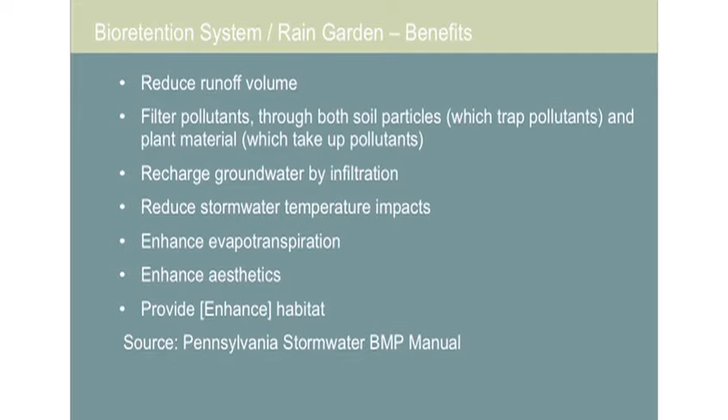And why? Reduce runoff volume, filter pollutants, recharge groundwater, reduce stormwater temperature impacts on streams, enhance evapotranspiration out of the plants, enhance aesthetics, and enhance habitat. Bioretention areas, rain gardens, are a water quality and quantity control practice using chemical, biological, and physical properties of plants, microbes, and soils for removal of pollutants from stormwater runoff. I really like that definition. So that's what a rain garden does.

So here in our region, we have highly built up areas, and the runoff from those areas contains pollutants. And most storms are small storms, so by catching the first inch of runoff from pavements, you get most of the pollutants. So rain gardens are basically a water quality control system, and they do reduce volume a little bit.

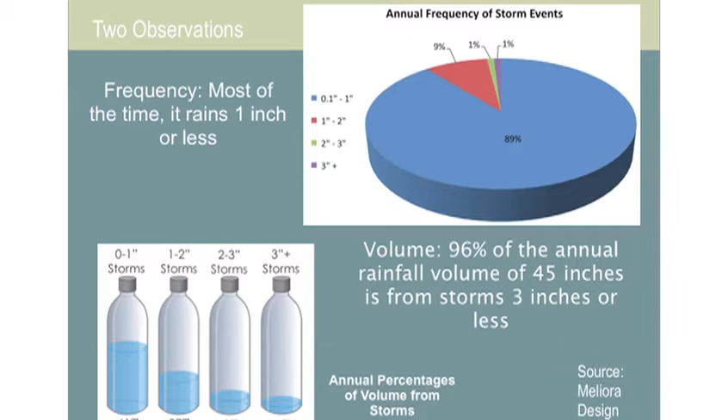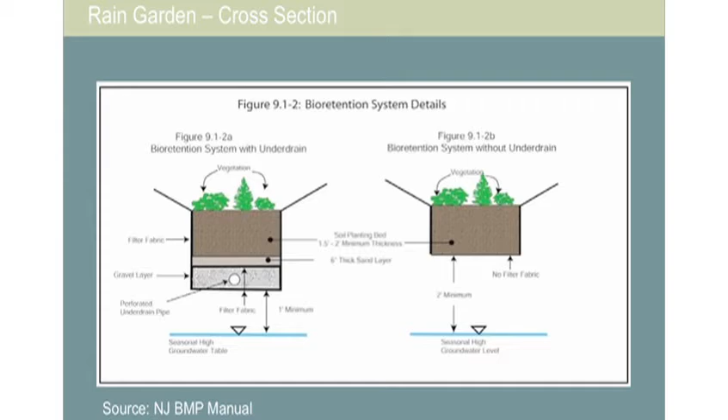There's two basic types of rain gardens, one with an underdrain and one without. If the soils don't perk well, you use an underdrain, or if you really want to engineer it, some projects, like for a new construction, require a quick drain down of the soil within 2 days. So an engineer might choose to put an underdrain under it, but it adds a lot of cost, and I usually like to avoid that.

The infiltration testing process, first step is background evaluation. Things like soil surveys and looking at existing conditions. There might be a sketch plan from an engineer or that you do of where you think your rain garden might go. Now, if it's in your own backyard, it's pretty obvious. You know, you have a low area, maybe you want to put the rain garden there or away from the house. So just some basic background investigation.

And then for more serious engineering of rain gardens and bioretention areas, it's important to do a test pit, digging down about 72 to 90 inches. And I'll have a picture of what that looks like. So that's clearly with a backhoe. If you're doing a backyard rain garden, you really don't need to do this. It's a little bit more of observation, where if there are puddling areas in your backyard and they drain down within a couple of days, you've got a pretty good perk. So you don't have to go all the way down and do the major engineering.

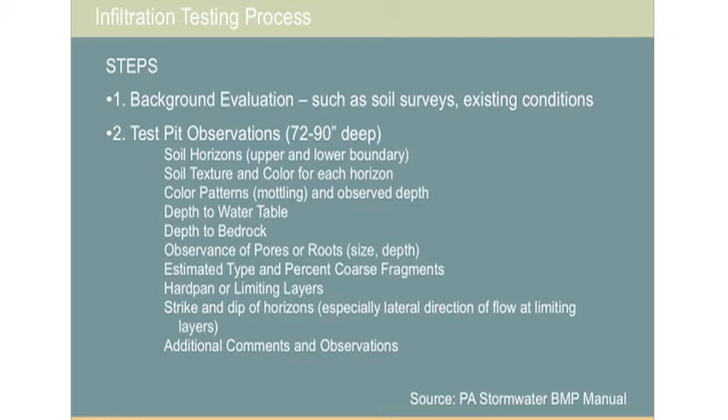These are the test pit observations when doing that. You look at soil horizons, soil texture, color patterns, depth to water table, like is there water down there? There's also an indication, which I'll show in a minute, of water table, how it affects soils. If you hit bedrock, clearly that's not a good place for a rain garden if it's shallow bedrock. And then just look at the rest of the features down in the pit.

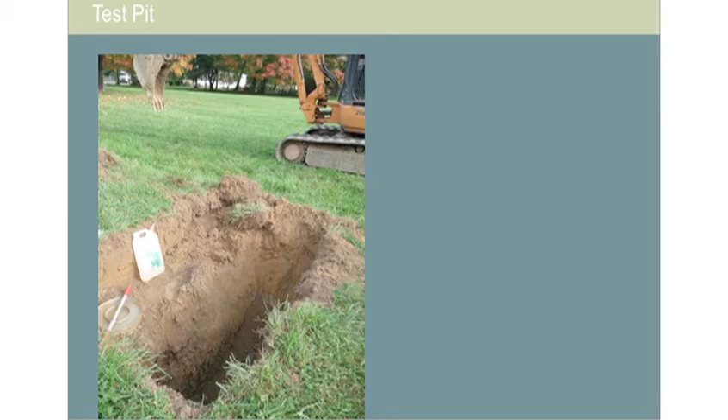That's an example of a test pit. This is Meliora that we worked with on Saddler's Woods, which is a Van Sciver rain garden. So it's about 6 to 7 feet deep, and it's used to check out the soil. And then there's this shelf right here, which is done where you can do the infiltration testing. So this is a pretty, yes?

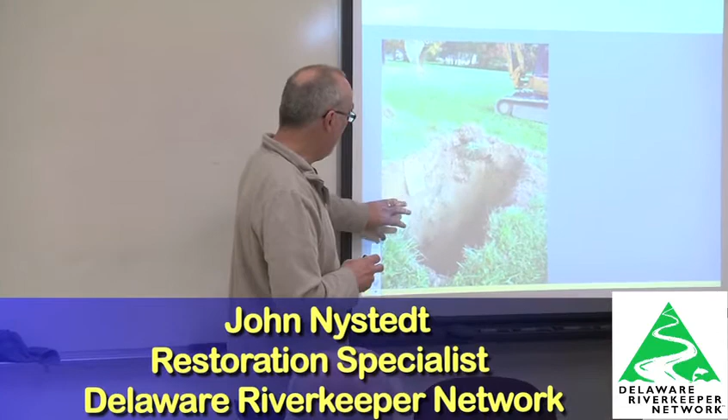So this is what we'll focus on a little bit today, the actual infiltration testing, but it's a whole process.

One thing one needs to do when looking down in these pits is to find out if there's any soil mottling showing some intermittent high water table. So when the water saturates the soil, it tends to be gray and does that type of mottling. So if we found that right here, which we did, we know that there is a little bit of water table coming up seasonally in this area. So it gives an indication.

If you have a high water table, it's hard to get percolation. Now in an engineered facility, getting approvals, that's a big deal. But if it's your backyard and you have an intermittent high water table, it's not the most horrible thing to have a little extra water some years in your own rain garden. My rain garden's like that. Some years it might fill up for a couple of days, but usually it just drains right down.

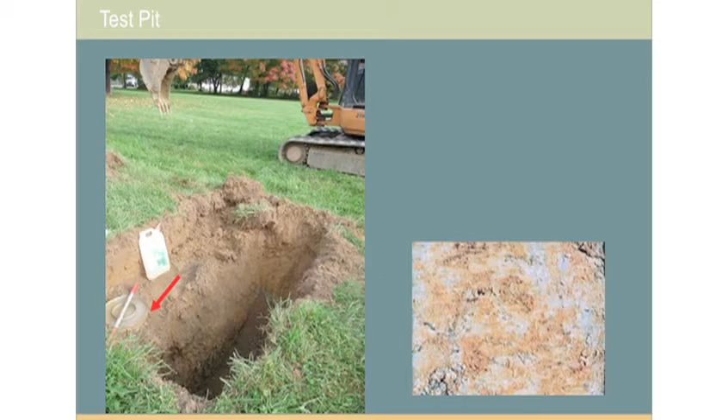This is the infiltration. That's called a double ring infiltrometer, and that's a pretty standard Pennsylvania test. And we'll talk about that a little bit more. It's important to do soil testing. I can't emphasize it enough. There's a whole transition now in the design field. Make sure to do the soil testing at the beginning because it helps everything at the end. You can save thousands of dollars.

If you do the soil test at the beginning, then you can figure out how to do the soil mix at the end. So a typical process is you get through it, you forget to do the soil test. You get to the end, you talk to the landscape architect, and they say, I really don't want to buy all these hundreds of thousands of cubic yards of rain garden mix. Can you use the soil that's there? And they'll say, well, I don't know what's there. So do this testing at the beginning.

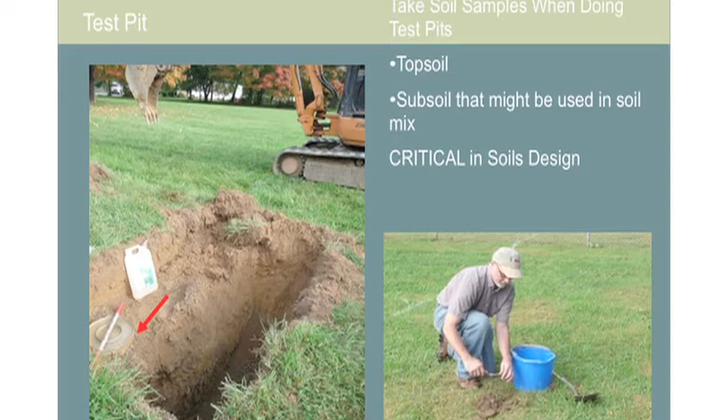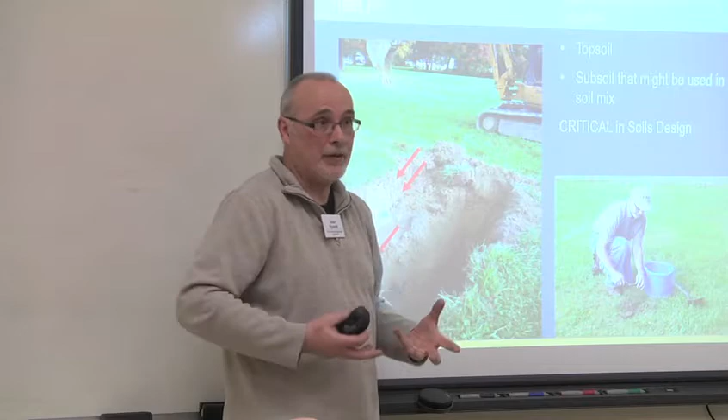Typically, what I test is the topsoil and then a little bit of the subsoil. So if we're going to dig down about 2 feet in this rain garden, then you know that soil there is available to mix into some new soil for the rain garden.

Infiltration testing you want to do at the intended bottom of the garden soil. So say you have a rain garden that is 1 foot deep, where the ground goes down, so you're going to dig down about 1 foot, and then there might be 1 foot of rain garden soil. So you want to go down 2 feet from the existing grade to do your infiltration test. The trick is to do it at the bottom of your new soil. So you've got to dig down.

Now, a lot of the videos you'll see of how to do an infiltration test informally, they just dig a hole right at the surface and do an infiltration test right there. And that often doesn't give a real indication of what's going on 2 feet down where the real percolation is happening.

So there's actually an exact nomenclature. Infiltration is the rate going straight down. Percolation, for the purposes of this presentation and Pennsylvania regulations, accounts for going straight down and sideways. So an infiltration test is actually what we want, what goes straight down, because a rain garden has a big area, water's going down everywhere, and very little's getting out the sides.

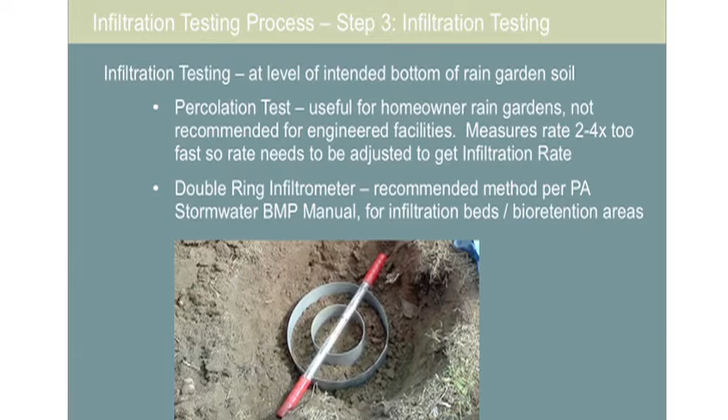This is a double ring infiltrometer, and how it works is that you fill up both sides. And we have one of these. We'll play with them a little bit if we have enough time. We'll go outside and do a quick demonstration. Fill it up, saturate the soil, and then the outer ring stays filled up. And what's measured is the inner ring.

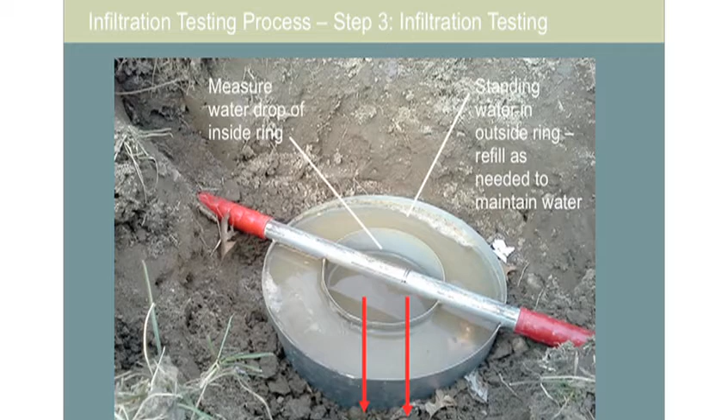So you keep adding water to the outer ring to keep it saturated, and the inner ring is where you measure. So if it goes down an inch in an hour, that's a good infiltration rate. Even a ½ inch in an hour is usable.

So what happens is the water in the outer part of the ring saturates the soil. Similar to, think of a whole rain garden situation. There's water coming down everywhere, so what you measure is the very middle. So the homeowner could dig his hole and saturate this hole first and then measure it. Is that a reasonable approximation?

No, that's a percolation test, and then you have to give the factor. So you have to reduce that percolation. I'll get to there in a second. You reduce that percolation rate by about 1/4 to about 1/2 to get to the infiltration rate.

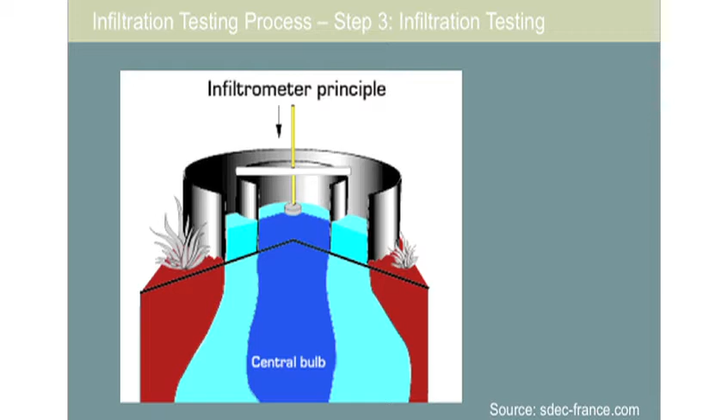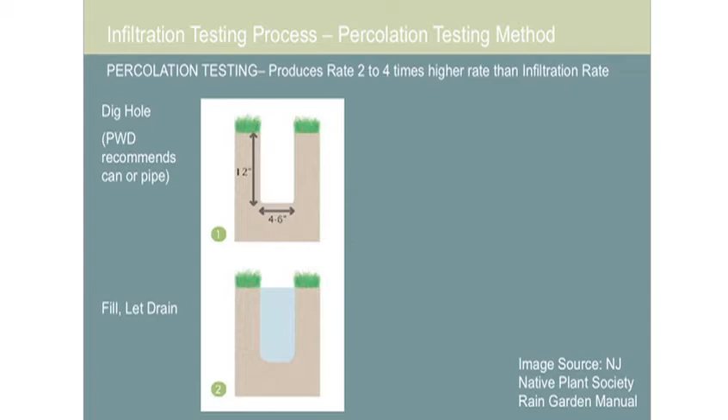So this is more of a test you'll find online, Philadelphia Water Department. You dig a hole, and you just fill it up, saturate it, and then start again. So we can do this at our homes pretty easily. Dig a hole down. Philadelphia Water Department says to put a can in or a pipe in here. So New Jersey Native Plant Society, say if you fill this up, and I'll get to it in a second, this is the saturation point. So you let all that draw down.

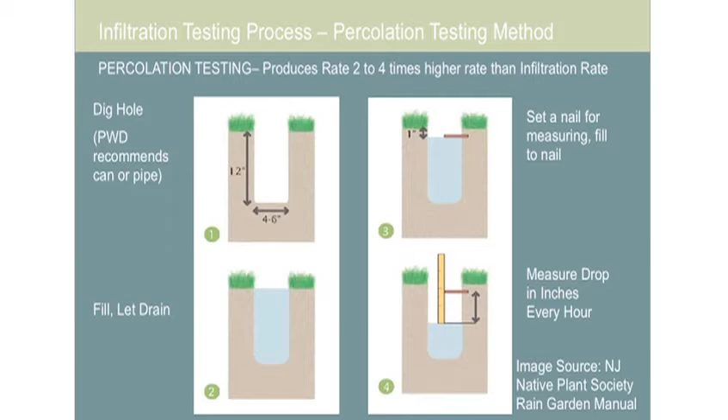And then here, you fill it back up to about 1 inch from the surface, put a nail in, and then measure the rate of drop. Now you can see this water is going out the sides too, as well as out the bottom, which is fine for a dry well, but for a rain garden, that's not really applicable. So there are technical factors that the Pennsylvania Stormwater Manual gives to it. Very technically, you can look it up about the reduction factor, but it's anywhere from 2 to 4 times reduction factor.

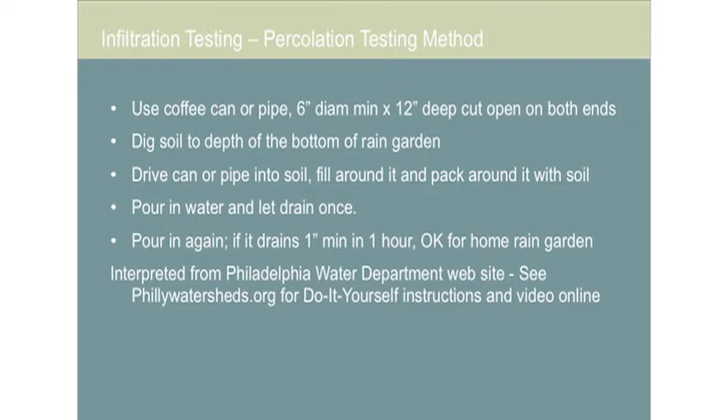What that probably relates to, and they call it infiltration rate, it's really a percolation rate. It probably relates to about a 1/2 inch per hour infiltration rate. Now the New Jersey Rain Garden Manual, they don't say to use a pipe on the edges. So they can perk out the sides, and they use a different number. It says 1.5 inches per hour is a minimum rate. So it looks like they've already adjusted it for it going out the sides and out the bottom. And again, that probably translates to about 1/2 inch per hour infiltration rate.

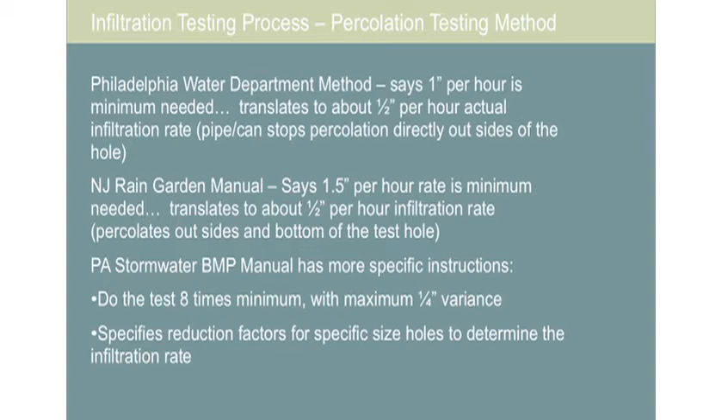The Pennsylvania BMP manual has more specific instructions. It does allow this type of testing for rain gardens, but then you have to put all types of factors on it. You have to do it 8 times minimum, and each time you measure it, you have to have a 1/4 inch difference. And if you don't get a 1/4 inch difference, you have to do it again and again and again. It's very hard to get a quarter inch variance. And then it specifies reduction factors for the specific size of the hole and how deep the hole is. So that chart's online.

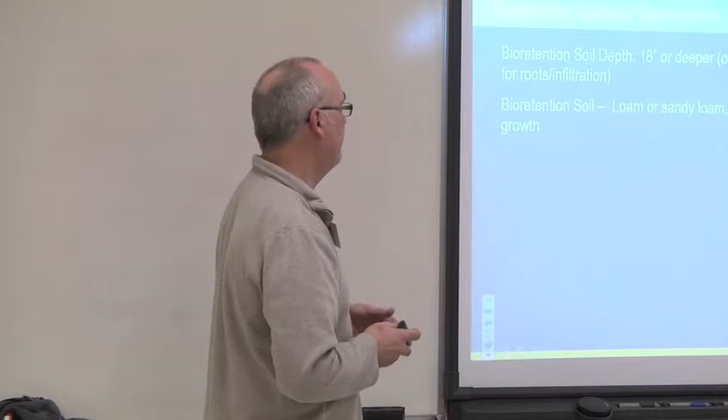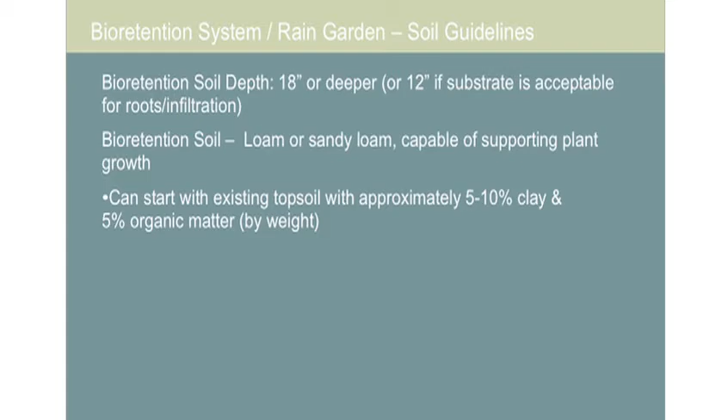So let's get into soil. Bioretention soil depth. 18 inches is a good depth. 12 inches works. 36 inches works. Everything helps. The soil can be loam or sandy loam, capable of supporting plant growth. And this is out of the Pennsylvania manual. You can start with existing topsoil. So if your existing topsoil already has 5 to 10% clay, that's a good topsoil to use for a rain garden soil mix. And you can blend it in, and it may have 5% organic matter by weight. That's just like the normal organic matter of our existing soils.

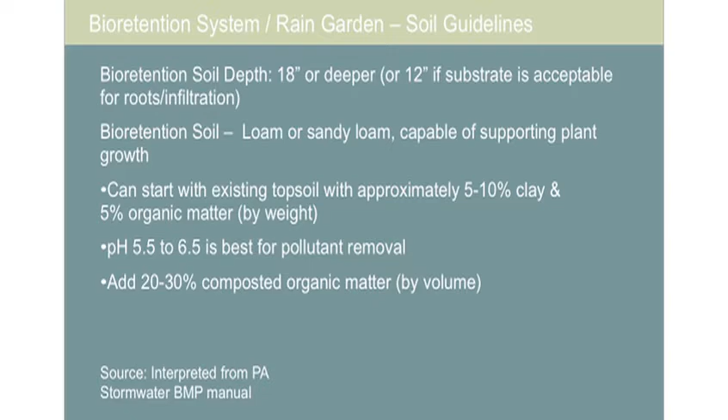pH 5.5 to 6.5 is best for pollutant removal. And then the manual says to add 20 to 30% composted organic matter by volume. So that's a good basic spec. Most people, if you have a reasonable soil, can just add compost, and it will work. But I just thought it'd be fun to look at the chart here.

Okay, so it's a loam or sandy loam in this part of the soil chart. This is the clay, so follow the lines that way. This is silt, follow the lines that way. This is sand, follow the lines that way. So I just really like this. It says loam, 20% clay, 40% sand, 40% silt.

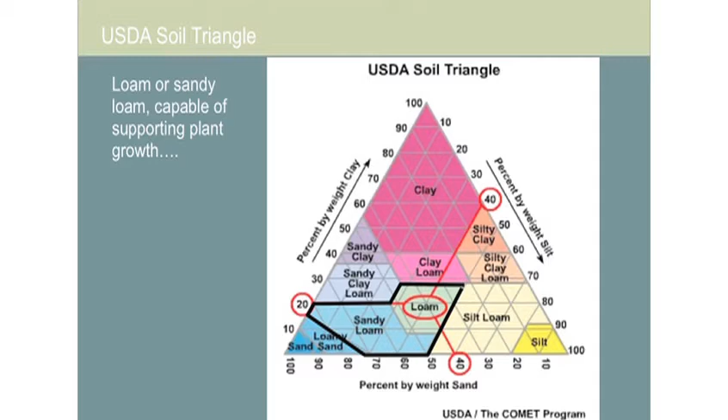This is the area that is useful for rain garden mix. But it's really nice to have the sand component in the 40 to 70% range. So a little bit more in here is a rain garden soil.

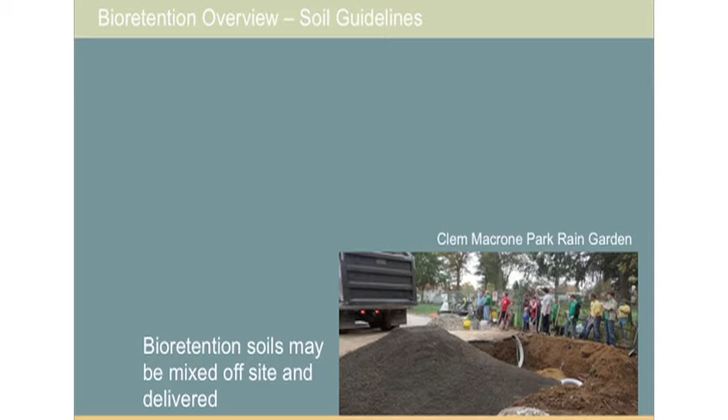I'll do another recipe here if you're going to just make it, or sometimes you buy it from a place that makes it. 50 to 60% sand, 20 to 30% topsoil with a low clay content, and 20 to 30% leaf compost. And that's from Prince George's County. They're leaders in bioretention techniques. They're a good resource. And they say for a residential rain garden, sandy loam, loamy sand, and loam soils are usually okay. The soil test will tell you what you have.

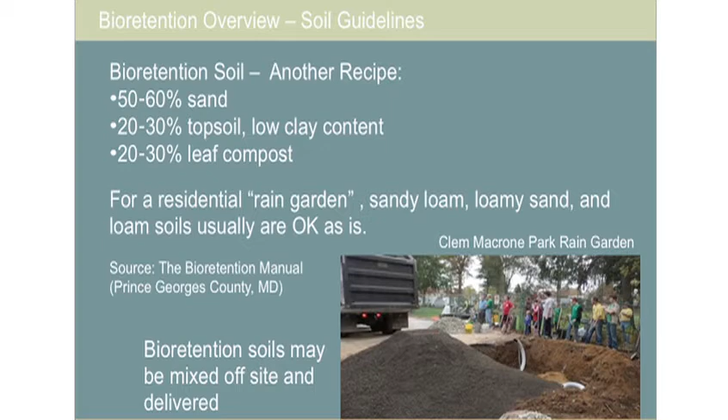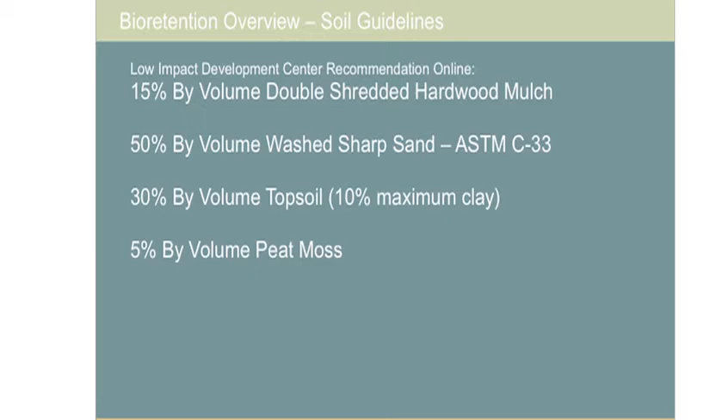This is another one I found online, a little bit different. This is the Low Impact Development Center. So they say 15% by volume double shredded hardwood mulch. So that was an unusual one compared to a lot of other standards. 50% washed sharp sand, that's about right. Topsoil, yeah, that's okay. 10% maximum clay, and 5% by volume peat moss. So I put this up as you can't always follow everything you find online.

I generally wouldn't use hardwood mulch, double shredded. It tends to be shipped down from Canada. Try to find a local composted wood chip. What the wood chips or the hardwood mulch do is they break down slower. So it's similar to a green roof soil mix that has a little bit larger material. It breaks down slower, so it gives a long-term organic matter input. So I haven't done this, but I see the logic in it.

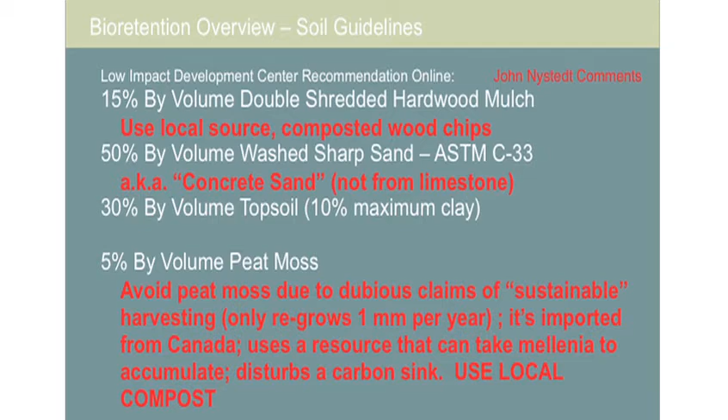50% volume washed sharp sand. That's good. It's also called concrete sand. Just make sure it's not from limestone, which changes the pH. Now, peat moss is pretty unsustainable. It takes millennia to grow. So I would never use peat moss on a project. It changes the pH too. Not bad, it lowers it a little. But try to use local compost.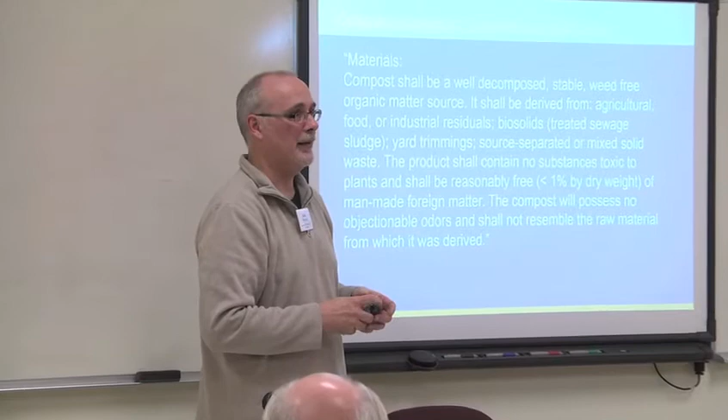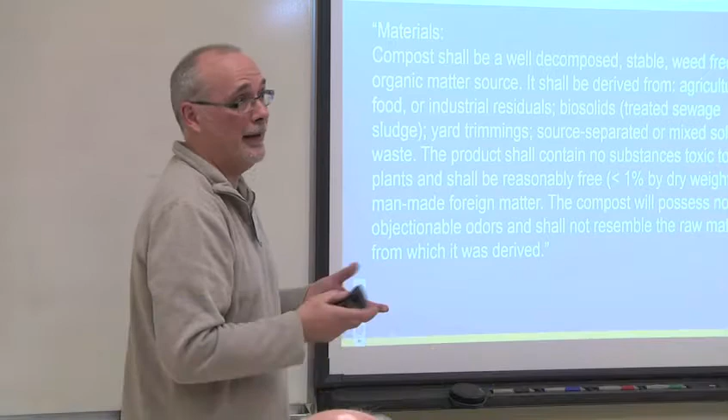Yeah, what I like, and it's in another slide, is I like to get it directly from the tree crew of the town. If they take down a tree in the summer, it comes with leaves and it comes with wood chips. And then you stockpile it someplace and then use that in the soil mix. So I like to know where it came from, because usually the tree crews aren't taking down invasive plants. And almost none of the street trees that I know of resprout from little chips. So it's more like the ailanthus that would resprout, and they tend to not be street trees, except, well, Philadelphia would have some.

Compost is an important item, and it's a little bit of a mystery, so I just thought I'd show you. This is a technical spec for compost. It does include in here sewage sludge, so you can just delete this definition. This is used in a soil mix when one might be buying one. So as a landscape architect, this is a type of description we would use for compost. I won't bore you by reading it. It needs to be weed-free. I've seen some soil mixes come in that are full of weeds. So it's good to know the resource and ask for the references.

Good landscapers will know who has the weed-free compost, because if they buy it from somebody who has a lot of weeds and they all come up, it's a pain in the butt. So they like to buy from weed-free suppliers. And how they do that, it might be what they blend, or if they compost it very well, it raises the heat and kills weed seeds. So the best thing to do is say reasonably weed-free. It's really hard to get it perfectly weed-free if it's an organic type operation.

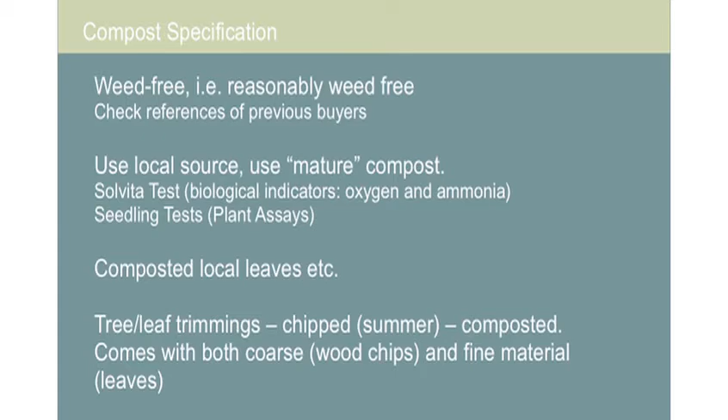Use a local source. Use mature compost, so that as it's breaking down, it's giving off gases, oxygen and ammonia. And then the other way that it's tested is through seedling tests. So these are two ways to specify compost as mature. Composted local leaves are perfect, like we're talking about in tree leaf trimmings.

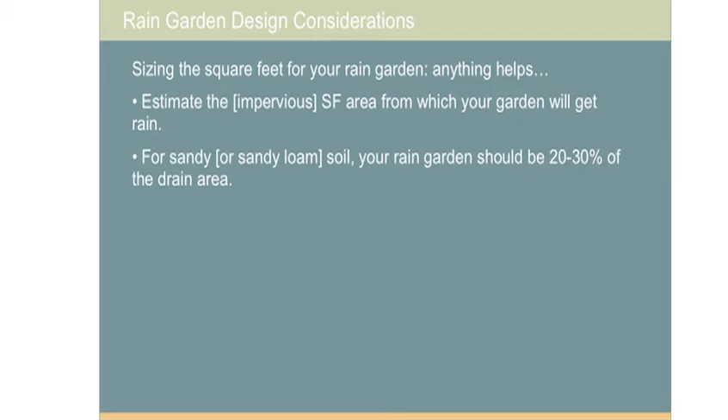Just quickly, I'll just talk about sizing the square feet of the rain garden because it is affected by the soils. If you have clay soils, more clay soils, the rain garden has to be bigger. So what you do is you figure out, okay, you've got this much roof, how big should the rain garden be? So if the roof was 1,000 square feet, the rain garden should be 200 to 300 square feet. So 20 to 30% of the drainage area.

If it's clay soils in your rain garden in the backyard, it ought to be about 50%, about half of the size of the roof, because it takes a lot longer. These are just ballpark figures. They help in planning. If you improve the soil drainage and the soil, or put in an under drain, then the rain garden generally should be about 20 to 30% of what's input.

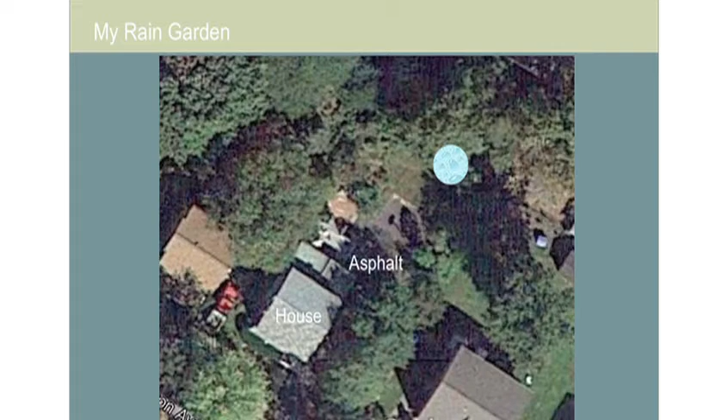So that's my little rain garden in the backyard. And I took this tree home in a paper cup from one seminar once. It's a river birch. Just quickly, my home, asphalt, rain garden over there. I did put some of the downspout into a pipe. I use it to water the garden through perforations, and then it overflows into the rain garden. It also takes water from the asphalt and from the landscape. That perforated pipe also happens to provide aeration for the garden too. So it's just a nice system.

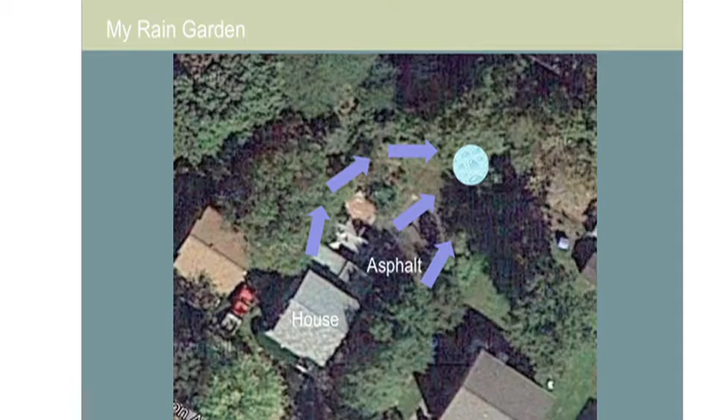This is one of the Delaware Riverkeeper Network. It was engineered by Melior Design and designed by Delaware Riverkeeper Network and Jonathan Alderson Landscape Architects. And I did show this last year, but I'm just going to get into the soils parts. We did soil testing. The rain garden wraps around the school. So we did soil testing and infiltration testing in 2 locations. And it was very interesting. The 2 locations ended up being very different. One had a lot of clay and one had a lot of sand.

So the topsoil was sandy loam generally everywhere. The critical thing to remember is clay. You want to be about 10% maximum. If you take one thing out of this seminar, 10% maximum clay for the soils, and you're golden. The pit east of the school had 23% on the clay, and the pit north of the school had clay down at 8%. And then we did do infiltration testing, so you can see the 23% had a ½ inch per hour infiltration rate, and the one that had clay of 8% had 1.44 inches per hour.

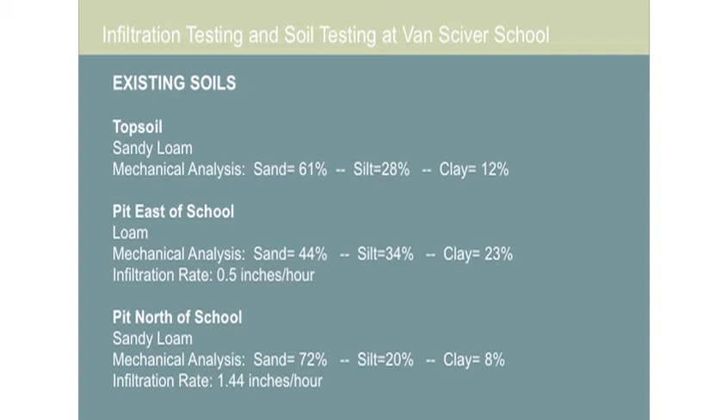So we adjusted the design on this. Just quickly, we took some of the sandy soil from the back, and put it in the front in a trench, and we took some of the clay soil that we had to excavate anyway out of the front and used it to make the berm in the back. So on this project, here is some of the rain gardens, then it wraps around the school right here. So this is the area that had a little more clay, and this is when it was just scooped out, not planted yet. Is this project written up somewhere so that one can see it?

Well, that's a good question. I should do that, right, Tracy? Yeah, absolutely. I'll do it as a fact sheet online. We'll get that up. We did present this also at the Villanova Stormwater Conference to the engineers there. So it's been published in videotape, but you're right, it should be online so you can just click on it and learn. Well, it's on videotape though at Villanova. It's on videotape from last year here, actually. Okay. Yeah, so it's on that one. I went into it pretty detailed.

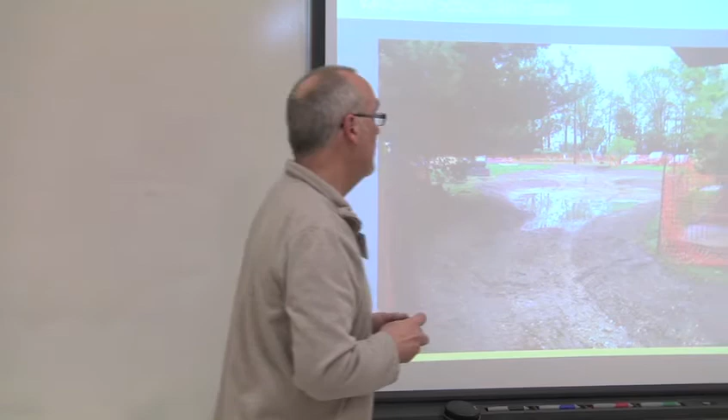Are those the clay soils making up your berms on the side, and were they placed by... Oh, that? Yeah. So this one here, for the sake of time, I actually deleted the existing conditions.

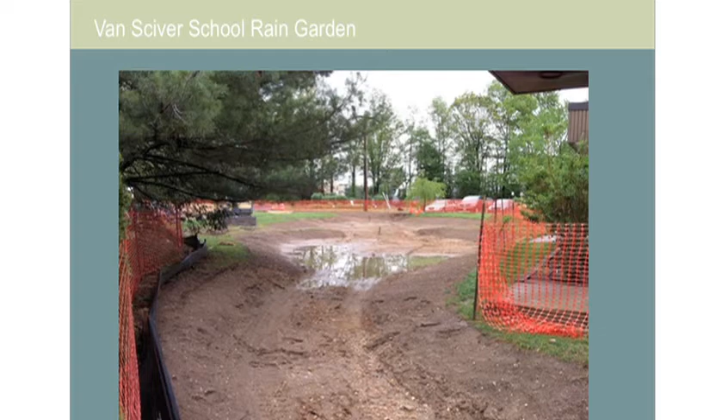This was flat lawn, so this was dug out. That's your shallow, right? Yeah, so we dug that out, and we kept these shallow in this area, just because of the clay soils we were worried about ponding. And we took that clay soil, and then for the rain garden down further, we built up the berms at the end. So that wrapped around the building. So now I'm going to go back here.

In general, I think it's just very important to include compost. Even if the soil didn't need it, it's important to do compost if just to get the top of the rain garden soil dug up a little. So you just heard another presentation about the compaction from the landscaper while they were building the rain garden.

Well, if you say to mix in compost at a certain ratio into the top 6 inches, then the last thing that contractor will do, if you keep an eye on them, is mix in the compost, and then they're done. So they mix in the compost, backing out, and then you have a nice friable soil top that allows infiltration into that soil. Mixing it in by a big rototiller?

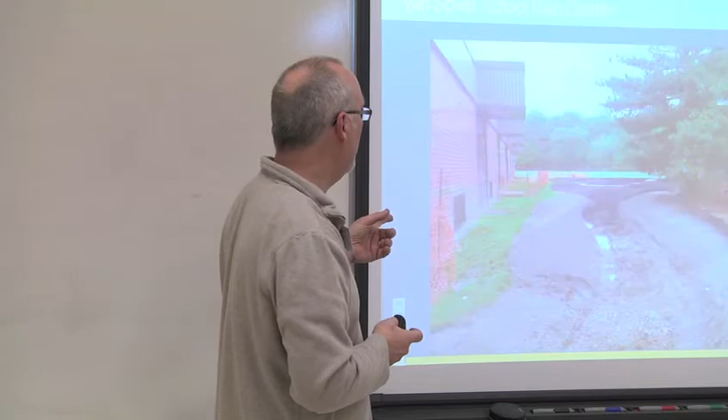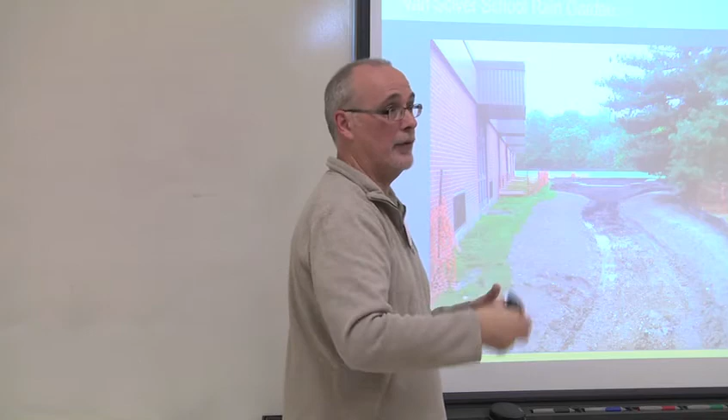Well, yes, people use rototillers. On this, they use something called a soil conditioner. I should have a picture of that. But they had a machine that had a cylinder about this big and it had things sticking out of it, and it would actually till the soil. And they use that for a couple of things. They use that to rip up the existing grass too. So that's what they chose to have on here. It was a light machine.

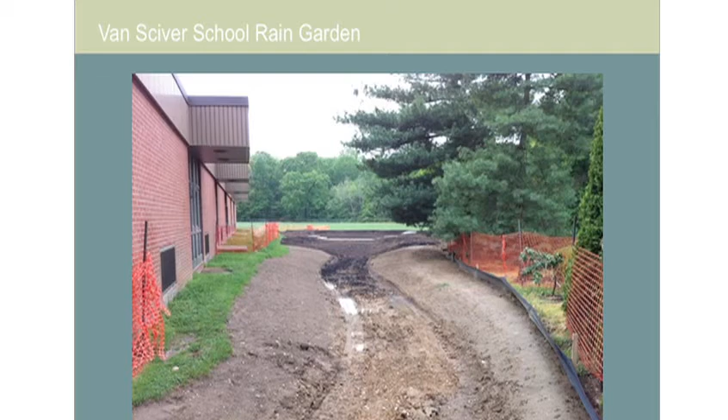So here it is, mixing it in. You can see this is the unblended soil here, and that has the compost blended in. So we're backing out. Oops. Yeah, backing out. And this is just a picture of that same area finished about a year later. There's a lot more I could go into this. I'm thinking that we should get outside and do a little infiltration test, but before we do that, any questions?

Does that affect the soil? Is it the salt content? Or? Yeah, that's what it is. And so it's a local recycled material. That's a plus, but it does have some factors in it that are worth caution.

What time element is connected with mature compost? 6 months to a year, but like for me, when I pile my leaves in the backyard and I don't have enough grass clippings, that doesn't do anything for 6 months. So if it's done right, with the right ingredients, and there's all kinds of online. Who does composting and just can answer that question? 6 months, a year? You got to aerate it. Yeah, it has to be aerated.

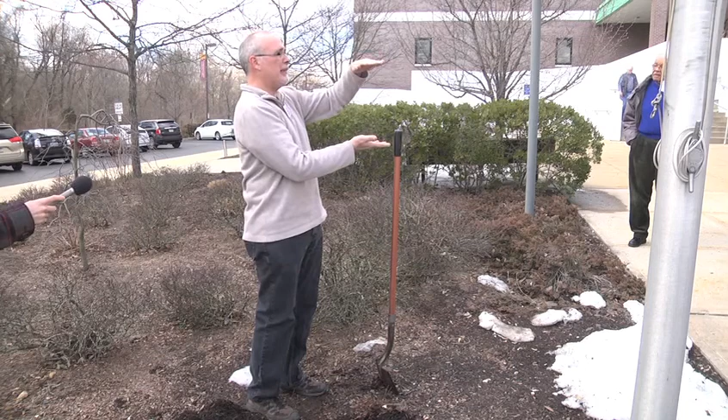The rain garden's, say, a foot deep. It might fill up with 6 inches of water, and then you might have a foot of rain garden soil, maybe 2 feet. So the trick is the percolation is below that, because your rain garden soil should be designed to have low clay and enough sand in it that it'll go through. So what you care about is what's under that. So let's assume this is down a couple of feet.

This needs to go in about an inch, 2 inches, they say. Sometimes these are 6 inches high, but this one's only 4 inches high. So if you had a 6-inch high one, you could go in 2 inches and have about 4 inches left over for water.

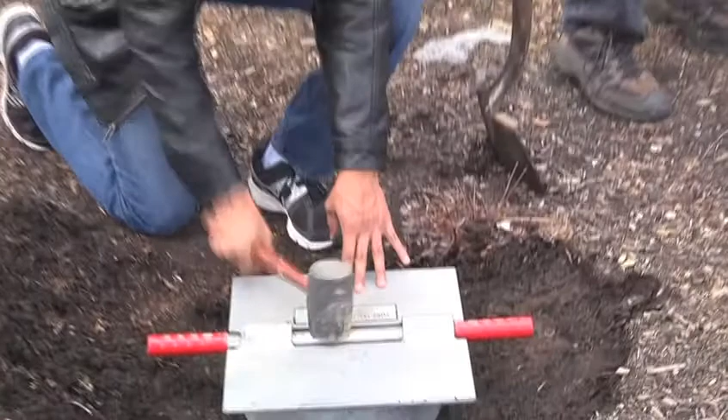It's fun to do. You have to bang it in. That's what this is for. There's your sledgehammer. Stand on this side because we have a camera there. And just bang that down. Hold your ears. Yep. Let me get all the way around. Good. That's good. Probably a little bit more. Trick is to be level. A few clicks. Pretty much, let's assume it's level.

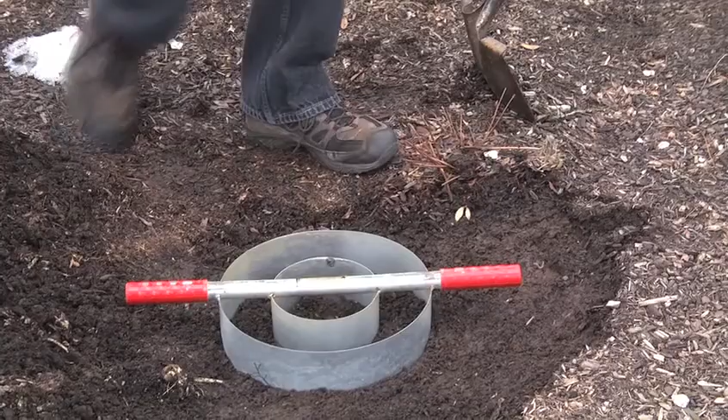The first thing you do for about an hour is fill it up and soak it. Center and edge? Yes. So we'll assume we've pre-soaked it. You see here it says testing procedure, pre-soak. During the pre-soak period, there's a protocol for how fast it drains, and then it determines the intervals of how often you test. The interval is usually every half hour, but it might be as little as 10 minutes if it soaks through fast on the pre-test.

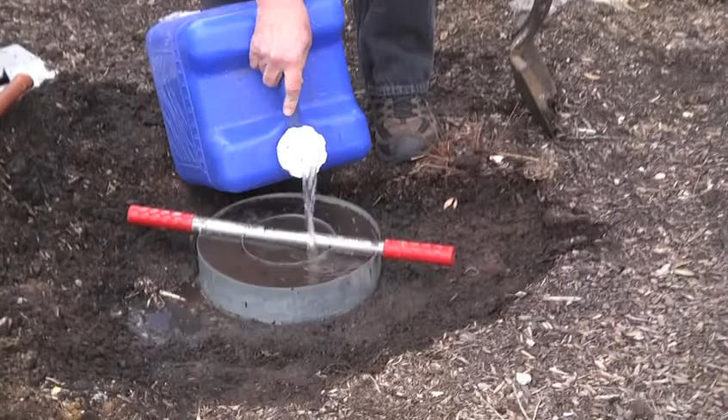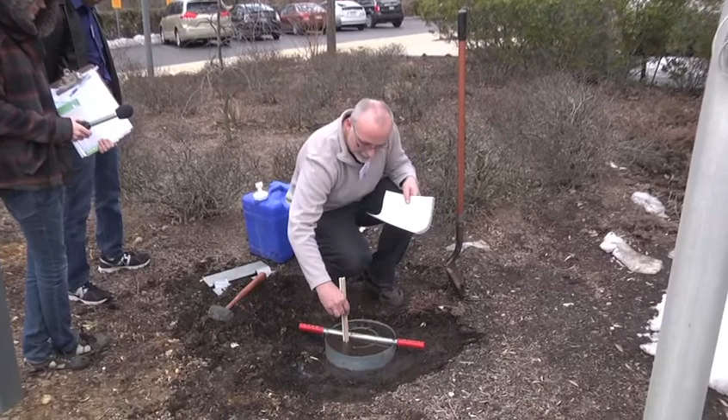So let's assume now we finished the pre-test and we're doing every 30 minutes for the test. So what we do is we refill it, and we're going to measure it. We'll start the timer, keep a log. And what's measured is this right here. Take your trusty ruler, and after a half an hour, measure how far down it went. Never refill this area, but if the outside happens to all drain out, refill that.

Now when you're pouring it in, it's nice to break up the water so it doesn't mess up the soil underneath too much. This is helping it go straight down, saturating the soil. So do it multiple times according to procedures, 8 consecutive readings. So that's an all-day event, and you get pretty bored. You can sometimes do 2 of these at the same time. Bring a good lunch, the whole bit.

And as it goes down, it's going to slow down each time, isn't it? The trick is to get a steady rate. So if you're finding it slow down, you can't use those readings that went fast. You have to use 8 consecutive readings within a 1/4 inch or less. That's to meet Pennsylvania guidelines. Quarter inch per unit time. That's right. So it's a variance. You need to keep your variance very close.

Now for me, if I'm doing a voluntary rain garden, which many are, as we're doing volunteer work and retrofits, I do 4 in a row, but the engineers and submissions have to do 8 in a row. And that could take a while. And that's it. It's really that simple. I just wanted to demystify it. It's fun to watch.